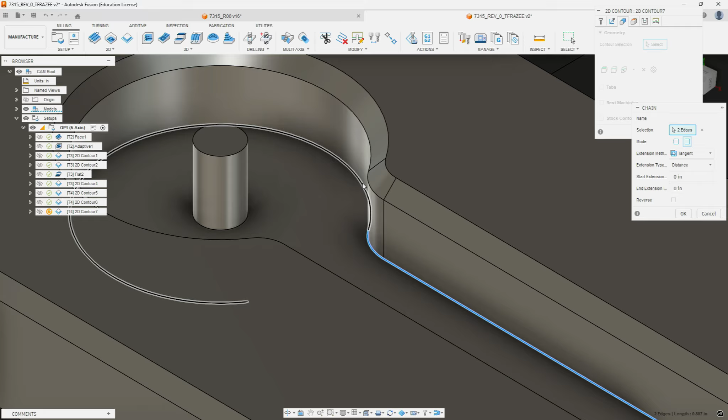And we're going to loop around just the outside of this. Okay, and then we're going to leave that as is.

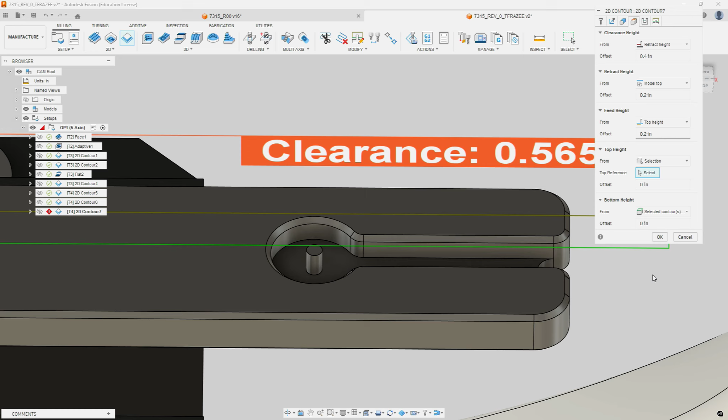We're going to go to the Heights tab. We're going to go from Model Top, Stock Top. Our top height is actually going to be Selection. We're going to pick the face of the model.

We're going to go down to the selected contours we just selected. Under Passes, we're going to go to Wear, Compensation. We're going to do Roughing Passes.

0.03 again, leave that at default. We're going to hit multiple depths, 60 thousandths, one step over of 10 thousandths.

Rough final, use even step downs. We're going to go back up to the top here in our step over, finishing step over is going to be 5 thousandths. And we're going to check the smoothing box and leave that at default.

We're going to go to the linking tab. Our lead in direction is going to be 0. We're going to come in straight off the part, which means we have to put in a linear lead distance that's at least half the diameter of the cutter, but in this case we're going to actually go farther.

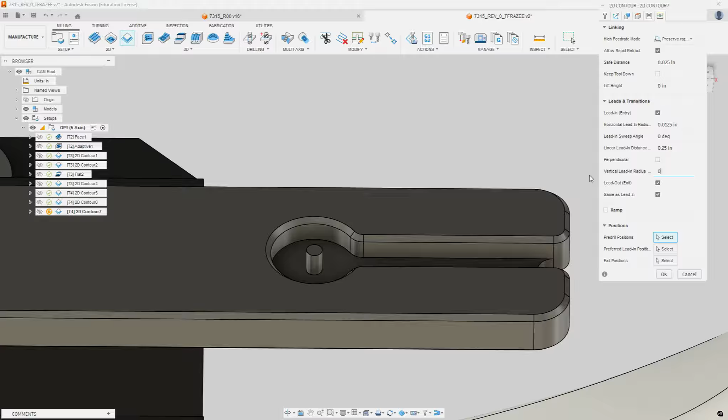We want to make sure we're starting clear of that slot feature. We're going to get rid of our vertical lead in radius. And that should be it. Hit OK. Alright, so we have our profile coming off the part.

We do a rough pass, finish pass on sides and on the ends. But if we look at this little pin feature, we've got a little, it's not finished, and that's on purpose. If we try to do that all at once, we get a cutter overlap error.

We're going to come back and do one more contour around that feature. We're going to actually highlight the routine we just did, and we're going to duplicate that. And I just noticed that my contours have now become unindexed.

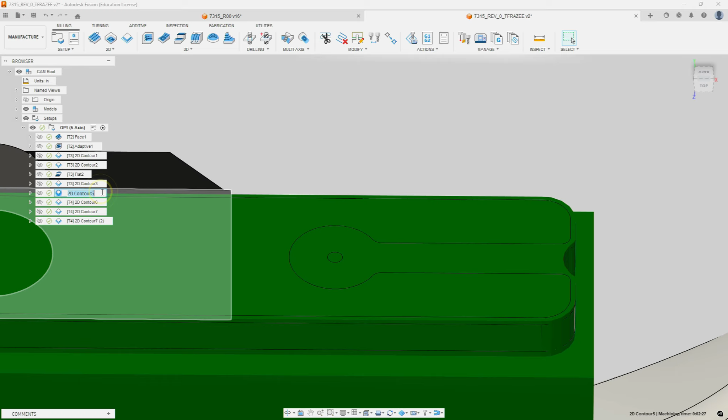Okay, so this one's actually 4. I'm changing them so they match the handout I gave you that has the operation numbers.

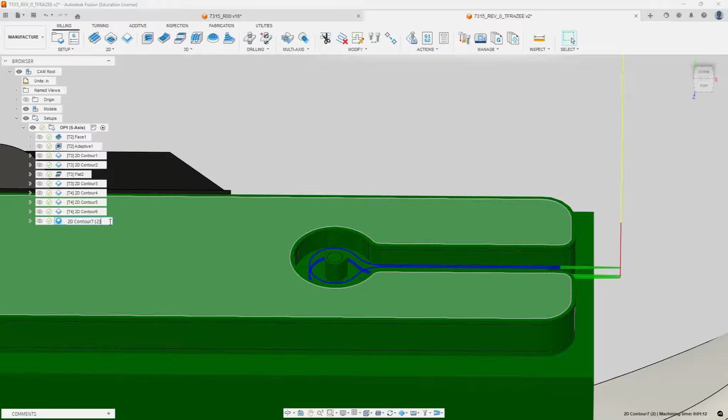Okay, so on operation 7, we should be able to go edit. We skip the first 2 tabs. We're going to geometry. We're going to clear the geometry that was selected before, and we're going to select just the boss. Make sure the arrow's on the outside of the boss feature.

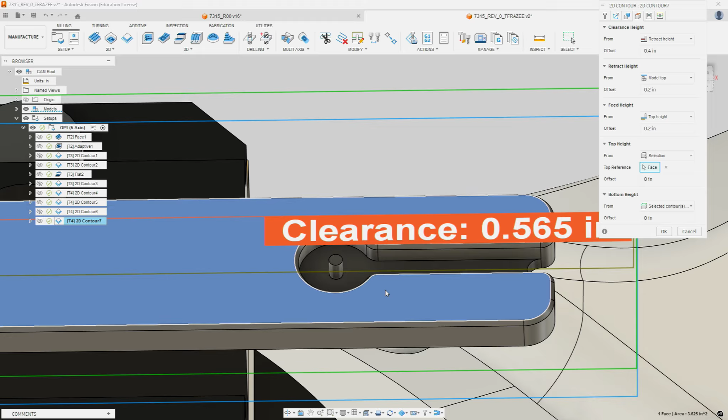We're going to go to the heights tab, and we can leave that at what we had selected because it's the same height and feature. And we're going to go to the passes tab. We can leave all this, I believe, at default.

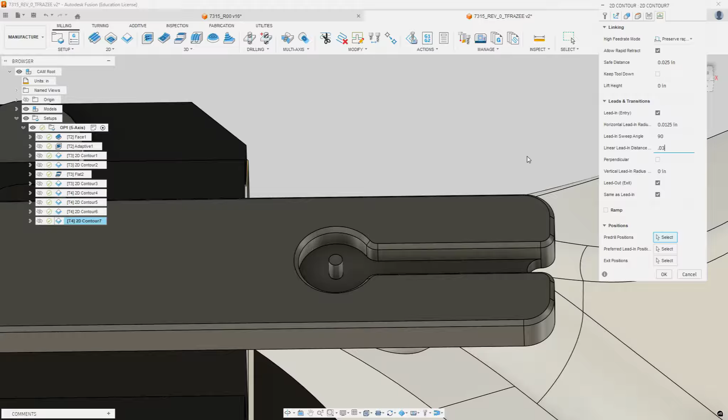And we're going to our linking tab, and there are some things we need to change there. We're going to go back from 0 to 90 on this. And our linear lead-in distance needs to go down to 0.03.

Go back to here. We're going to select our lead-in position, where it's going to be on this side of the pin. Hit OK. And that way it leads in coming from the slot and doesn't gouge our part.

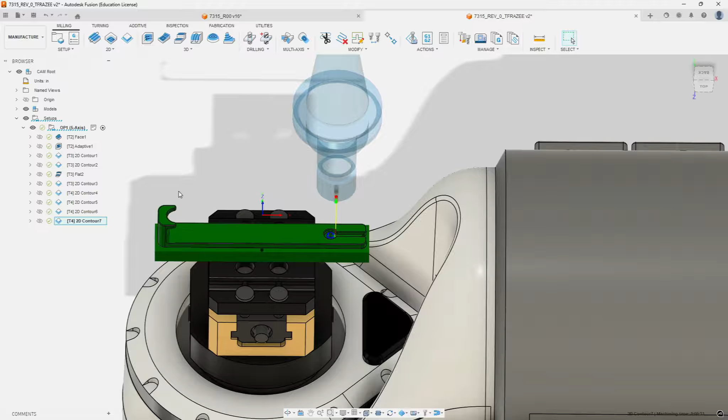Okay, so now we've finished all the surface stuff with an 1/8 inch end mill that's going to be facing the neutral position. Now we're going to go on and cut the other half of this feature here. So we have this rough material that needs to go away.

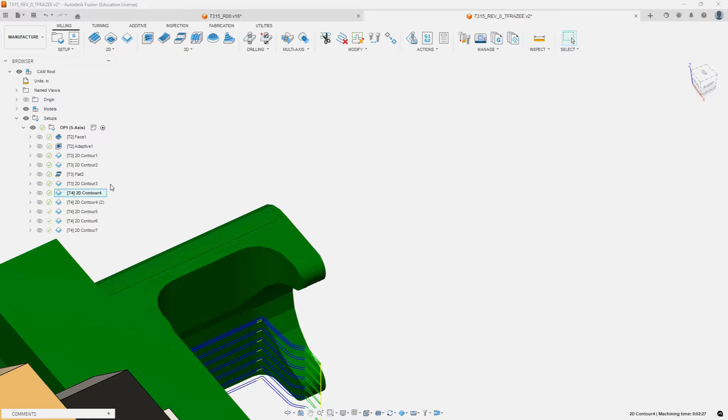And we did the first operation using what is contour number 4. We're going to right click on that one and we're going to duplicate it. And we're going to drag that one down below 7, and we're going to rename it 8.

Okay, so it should look like the toolpath cutting the C-shaped profile halfway to the part, minus 10 thou, from the opposite side of what we're currently looking at.

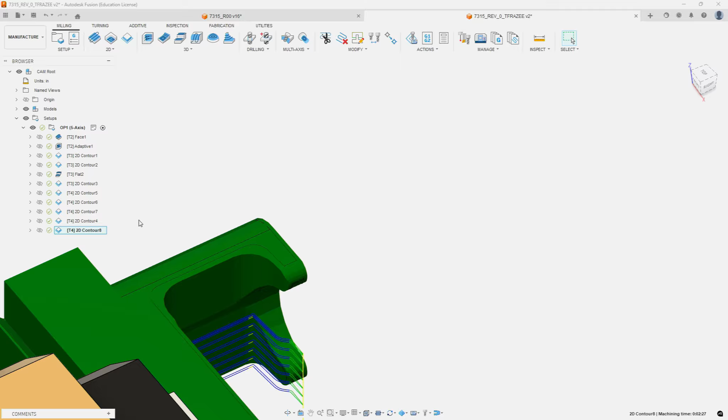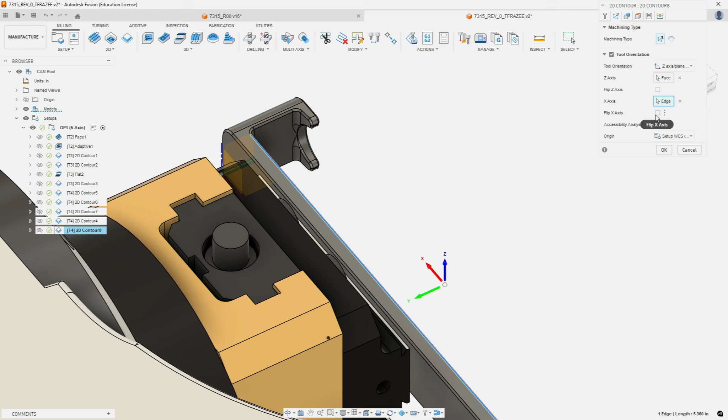We're now going to right click and edit that. We'll keep the first tab at default. The second tab we have to clear out, since we're looking at a different orientation of the part. So we need to select this face for the orientation of Z and one of these edges for X, and flip it if necessary. It should be pointing towards the body of this at all times.

Okay, we're going to go to the geometry tab. We can keep the selections we had from the other side, but as you can see we're leading in from an opposite edge here. So we're going to edit that chain and change the extension 0.25 to the opposite end of the part.

So now our extension's over here. We hit OK. We're going to go to the Heights tab. We can keep all this at default, and we can even keep the same point if you selected that one.

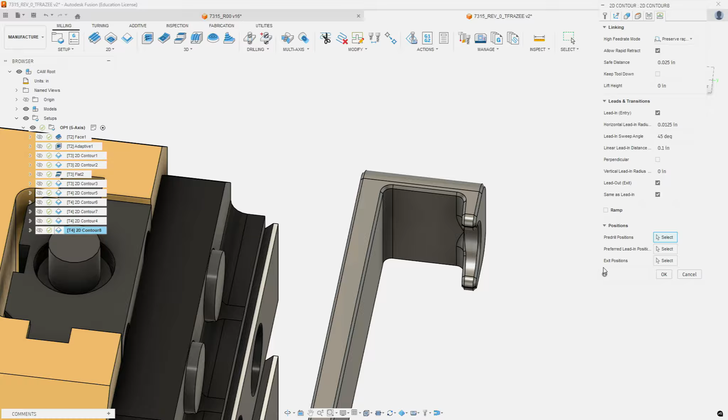We're going to go to the Passes tab. We should be able to keep all of this at default. We're going to go to the Linking tab, and we should be able to keep all of this at default as well. We'll hit OK, and it should be leading in off the workpiece into this chamfer and out on the opposite side.

Alright, now we have chamfering work to do. Okay, we're going to return to our home position, and we're going to start doing deburring passes. So our first deburring pass is going to be on the top edge of this part and around the base of this.

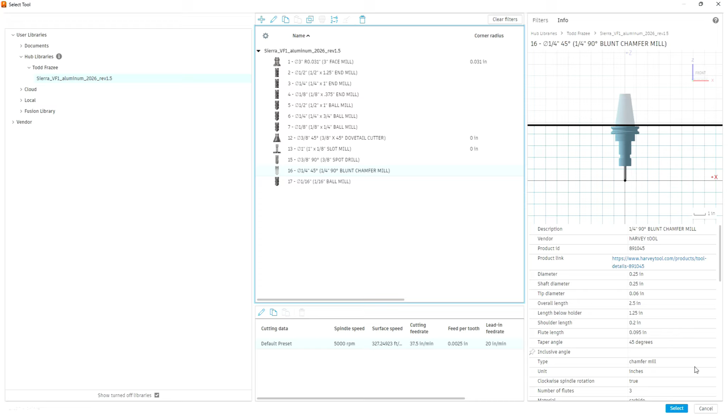Okay, so we're going to go to 2D chamfer, and we're going to go to our tool library, and we're going to select the 90 degree 1/4 inch blunt chamfer mill. Hit OK, select.

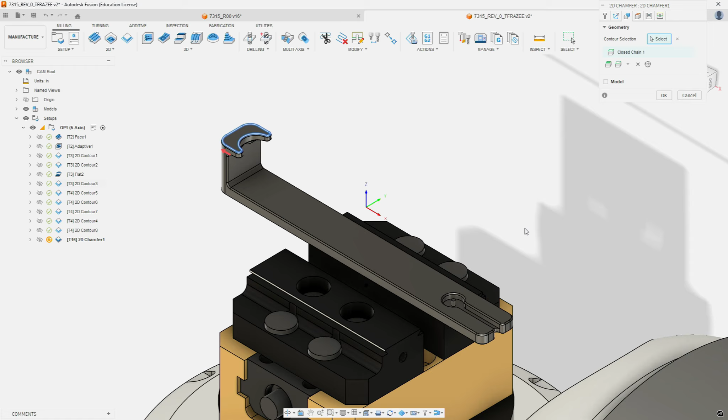Keep the first page on default. We don't have to do anything to our orientation because we're going back to 3-axis here. We're going to first select the top surface of this island, and then make sure the arrow is on the outside.

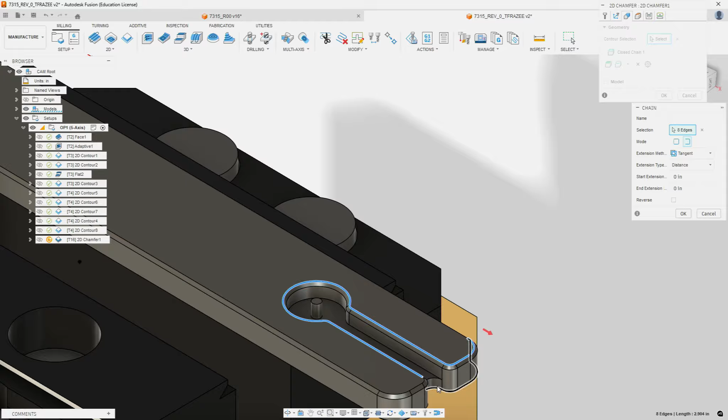And then our next chain is going to be an open selection, and it's going to be this outside radius, arc, this line, inside radius, line, arc, arc, arc, line, arc, line, and back out to the final one.

Now on this we're going to put a 0.25 extension on both ends. Make sure the arrow is on the outside, so that we're wrapping all the way around, and this chamfer is going to blend with another one that's going to be cut from the side. We're going to hit OK.

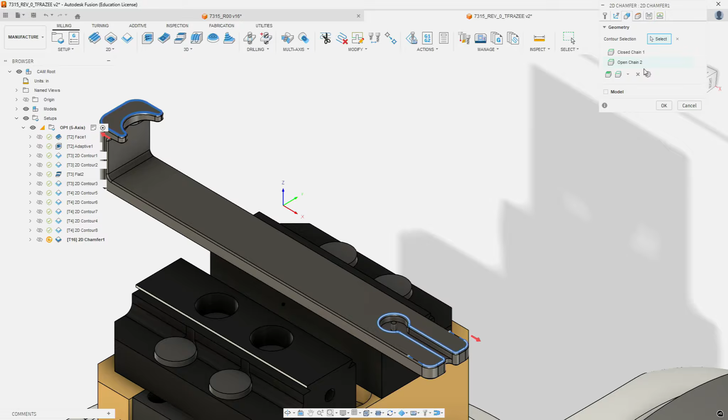Next we're going to go to the Heights tab, going from model top to selected contours. We're going to the Passes tab. We're going to leave all this default. We're going to check the smoothing box. We're going to go to the Linking tab, and everything else is going to be left at default.

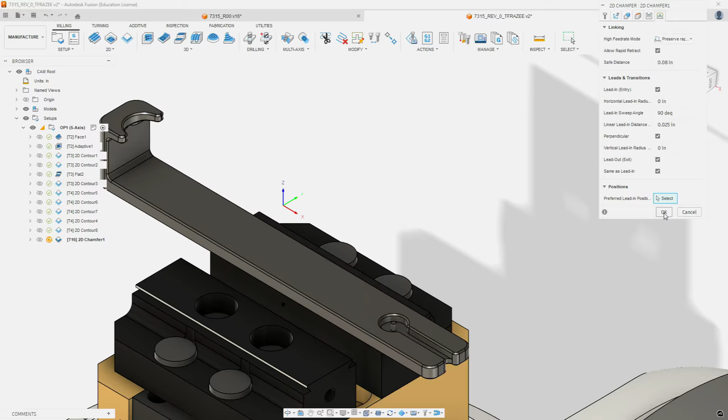We'll hit OK. So we've got a lead in. It's going to come around, loop around out there, and then up here on the top too. I'm not going to try to deburr this little post - it's so small we don't want to risk breaking that off. That's going to be a loop, a pin for the loop on a spring in the assembly.

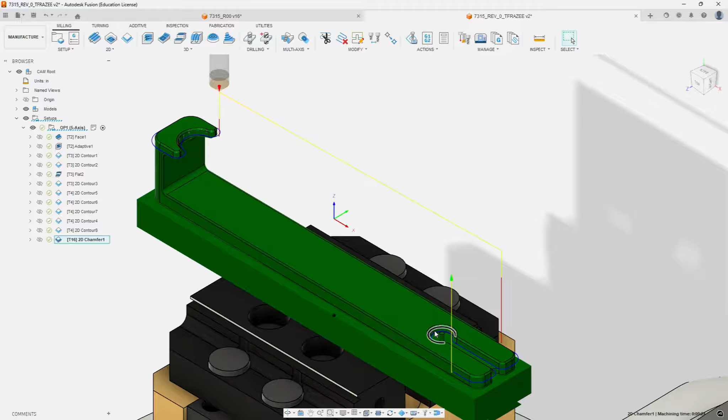Okay, so now we're going to go to chamfering the sides. So we're going to rotate back to this face facing the spindle. We're going to highlight the chamfer we just did, duplicate that chamfer, and change the name to 2.

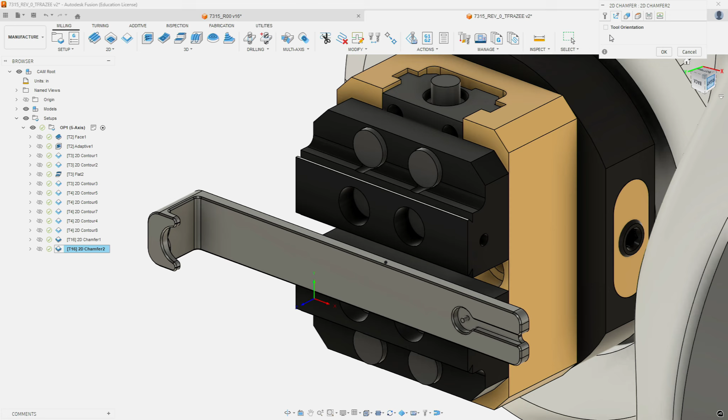We're going to edit this. It's critical we go to the multi-axis tab, check the tool orientation box. We're going to select a face that's normal to the spindle at the moment, which is that one, and our x-axis. Mine didn't need to be flipped.

We're going to go to geometry. We're going to clear out what's been selected before, and select another open chain.

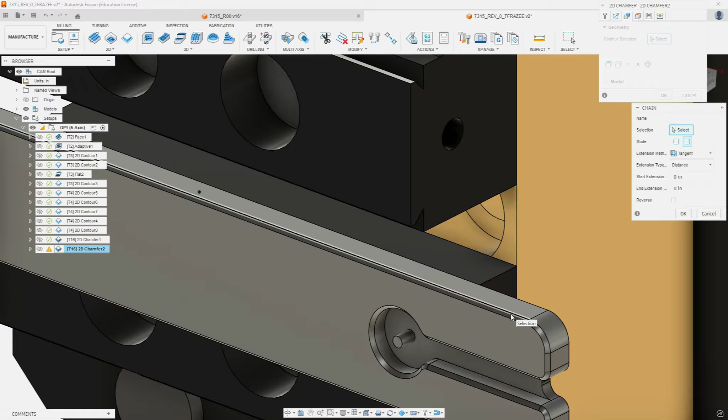Straight line, arc, arc. We're going to do an extension of 0.25 on both ends, so it shoots out the ends past these points.

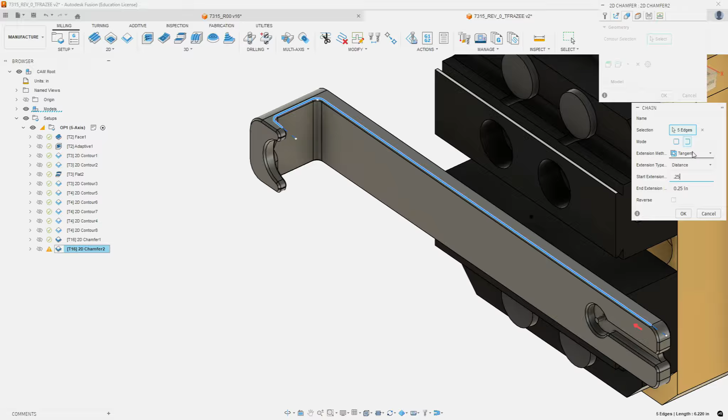We're going to hit OK. We're going to go to the Heights tab and leave everything at default. Now we're going to go to the Passes tab. We should be able to leave these at default, 60 and 60, smoothing on.

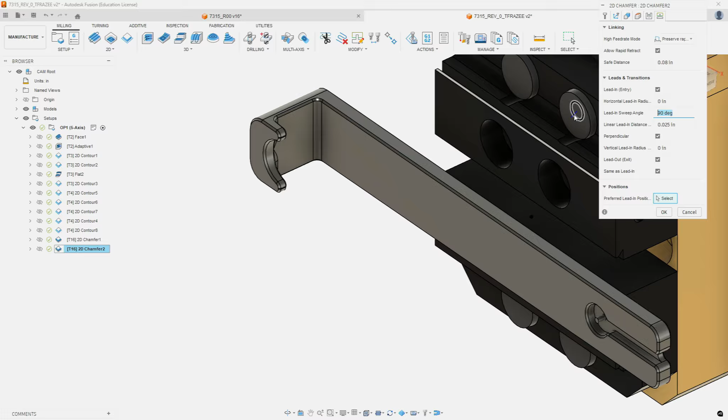Go to the Linking tab. Instead of going 90, we're going to go 0. We're going to deselect the perpendicular box. Our linear lead-in distance, we're going to increase that to 0.1875, and we're going to hit OK.

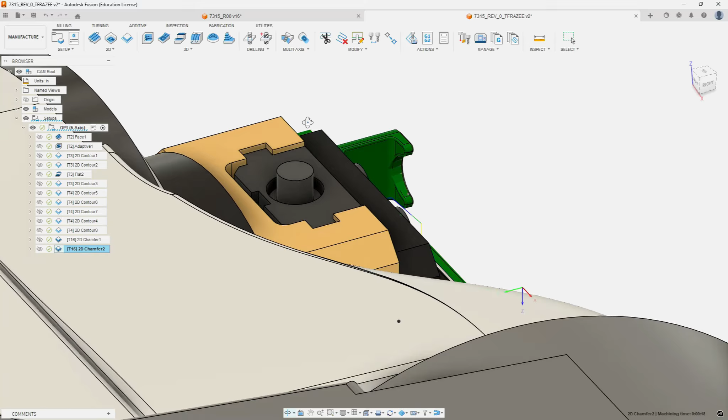So we should have it leading in off the workpiece on both ends. We're going to rotate like so, and we're going to right click on our toolpath we just made and duplicate that path.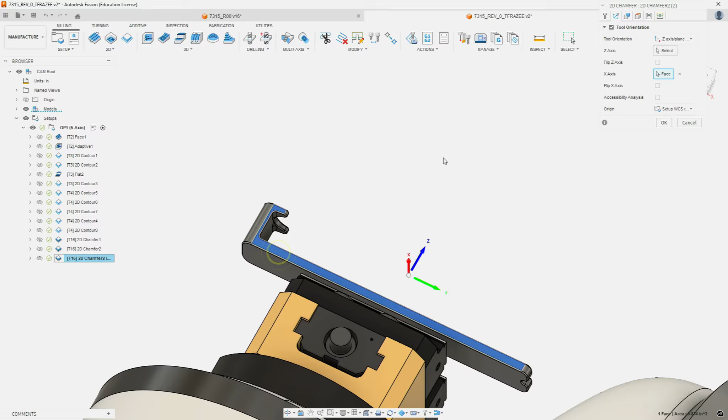We're going to go to Edit. On our multi-axis tab, we have to clear out our previous selections because we were rotating. We need to move it so that this face here is in line with the spindle, and our x-axis is in line with one of these edges. Looks like we need to flip it.

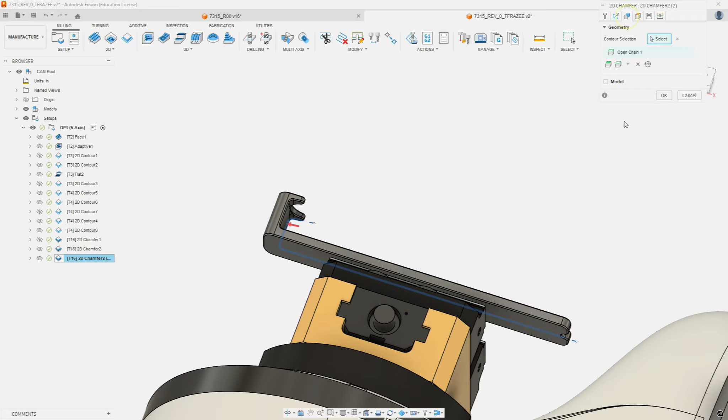We're going to go to the Geometry tab and clear out what was selected before. We're going to select a new chain, an open chain, starting here. We want to be selecting in the order of climb cutting so that the arrow's on the correct side.

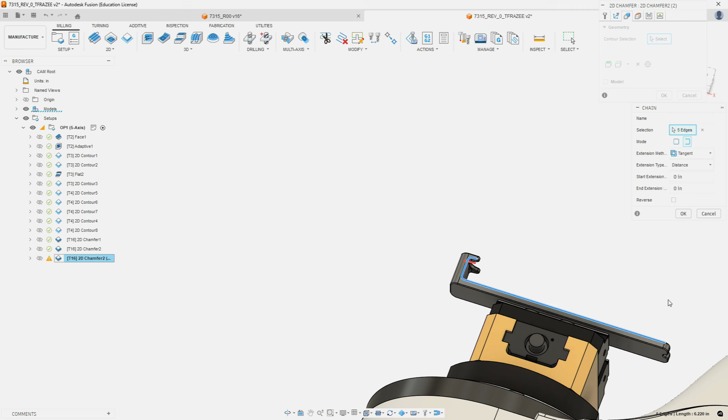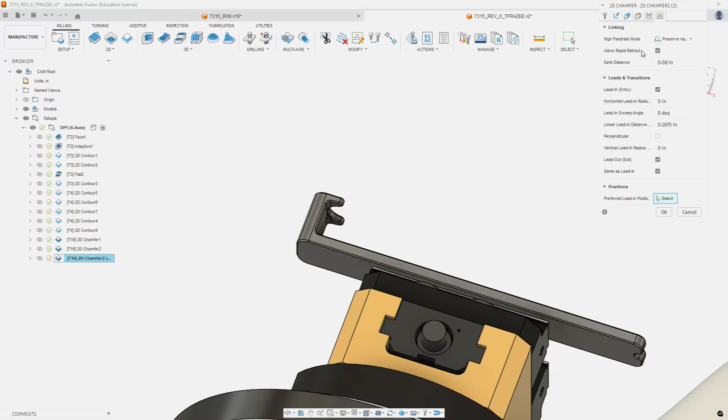And we're going to put a 0.25 extension on those passes. Hit OK. The Heights tab, everything should be at default. Passes should be at default if you copied it. Linking tab, everything should be at default here as well if you copied it. Hit OK. And we have our last chamfering for the side.

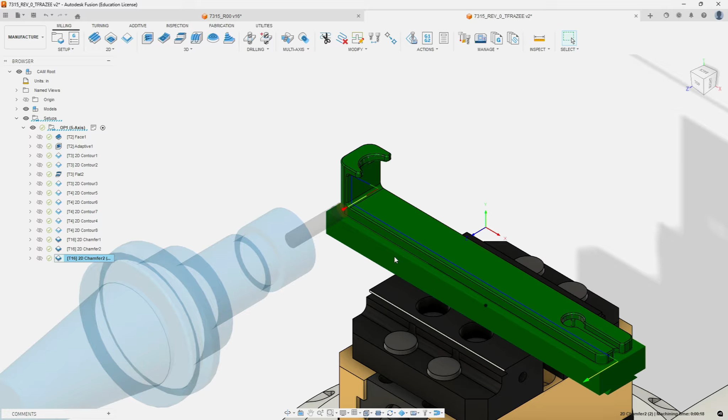Now there's one more operation we're going to do in 5-axis before we take this part out and put it in the 3-axis mill to remove this big block of material off the back. We are going to come in and attempt to cut as much of this bevel as we can with our dovetail cutter. Now it's not going to cut it the cleanest, but it'll at least remove some of the material, and you might have to do some hand blending.

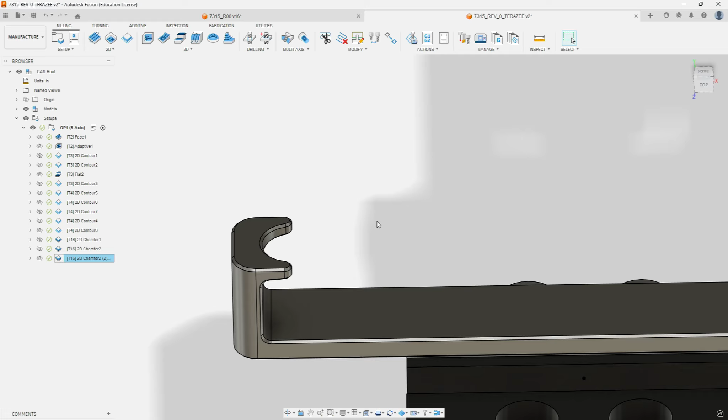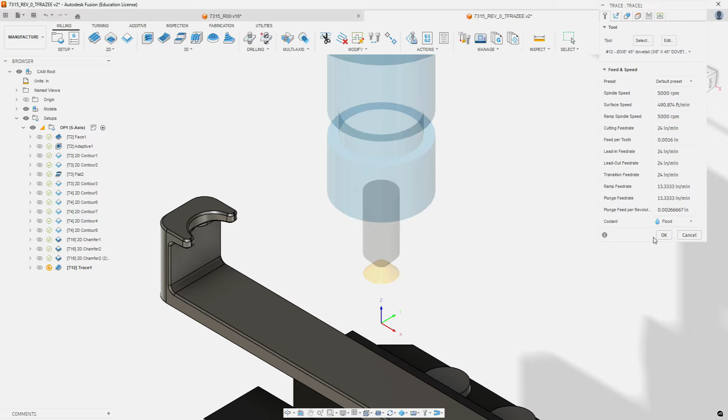So in order to do that, we're going to go to 2D, we're going to do a trace, and we're going to select our dovetail cutter we've been using, number 12, and we're going to leave everything at default feeds and speeds here. Multi-axis tab, we don't need to do anything because it's a 3-axis move, and we're going to select our geometry.

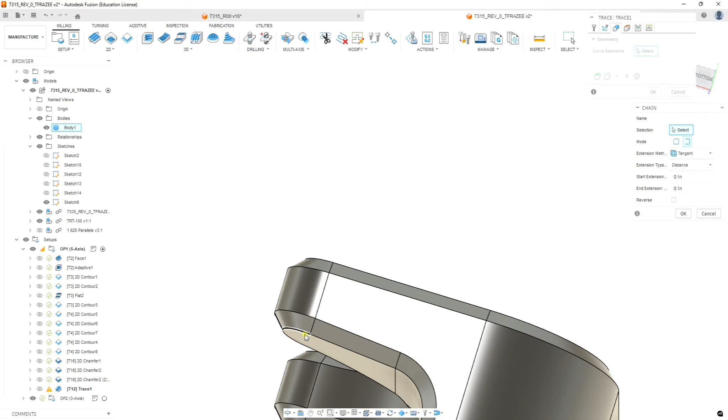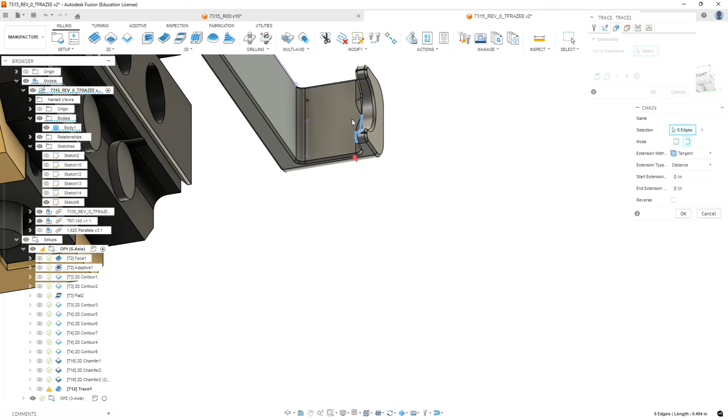We're going to look at the underside, and we're going to start with this lower radius. We're going to start with going to chain, open chain. We're going to start with this radius. Make sure the arrow is on the outside of the line. And we're going to trace around the bottom of this feature, and to the other edge.

Okay, and we're going to put an extension on this. My 2.5 should be enough. And it's not going to be a tangent extension, it's going to be the closest boundary. And we'll hit OK.

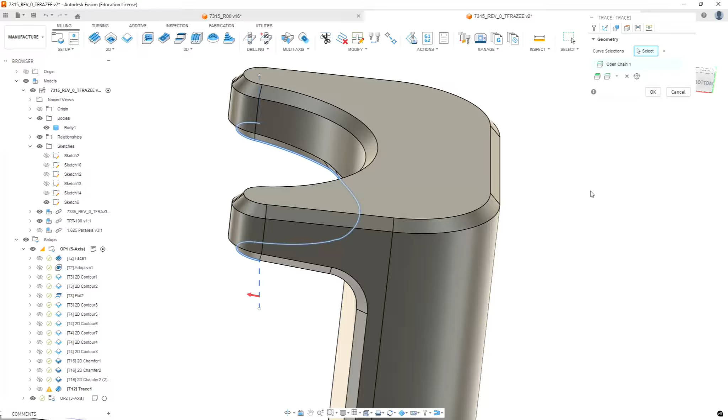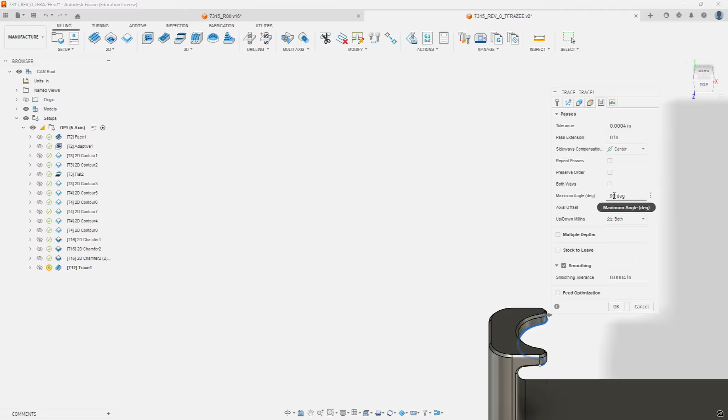And then we're going to go to the Heights tab. In this case, I think we're just going to leave everything where it's at. Go to the Passes tab. Select the smoothing box. And the other box we need to check on here is we want to go from center, which is the default for trace, to left, so it'll offset as if it's climb cutting. And make sure the arrow is pointing to the left, this gray arrow, of our line.

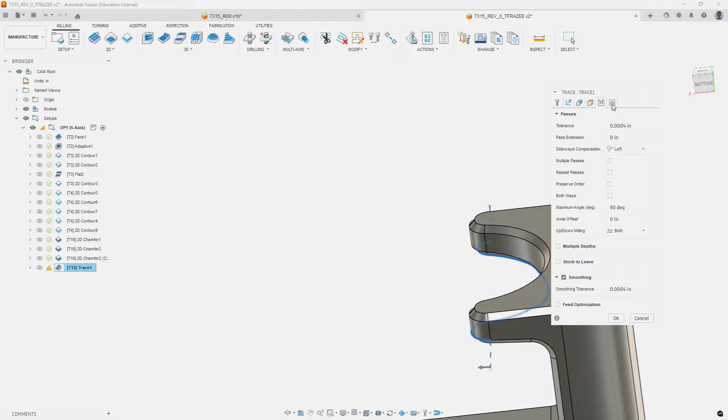Now we're going to go on to the Linking tab. Okay, that's it for the 5-axis.